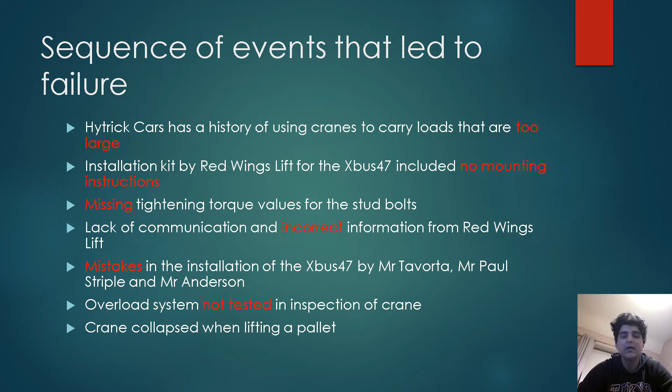When looking at the culpability of the parties involved, we decided that only two parties will share the most culpability. One is Hytrick Cars and the other one is Red Wings Lift. The reason Hytrick Cars shares the most culpability, specifically Mr. Anderson, is because he authorized the use of the crane, even though it was against regulations and it was not installed according to specification.

Also, Red Wings Lift is also held accountable because they delivered the wrong stud bolts to the branch, and they also failed to provide information for the installation of the crane when it was specifically asked by Mr. Anderson.

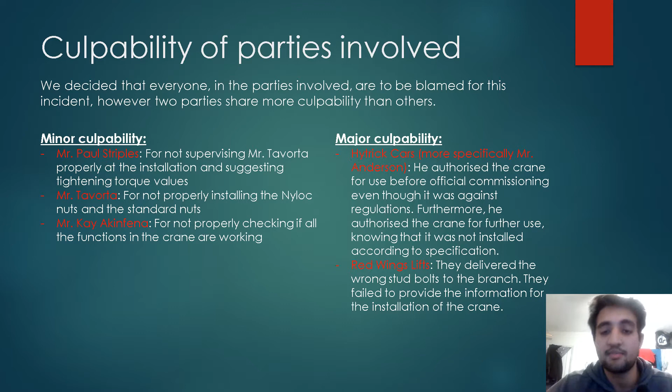Since the crane broke at the connection of the plinth and the base of the crane, this is where most of the design critiques must be. This is true because two major faults are identified here. The first one is that the nuts were fitted on the opposite way. The Nyloc locking nuts should be on top and the standard nut should be on the bottom. Since it's the other way around, it makes it weaker and the bolt more susceptible to detaching.

Also, the wrong stud bolts were used at this connection, as the stud bolts of the old crane were used instead of the stud bolts for the new crane. This leads to two issues. Both bolts have different tightening torques. The bolt that was meant to be used, the M30X500, has a tightening torque of 550 Newton meters, and the bolt that was used, the M24X500, has a tightening torque of 350 Newton meters. This means that the bolts would have over tightened.

In addition to this, both bolts have different proof loads and different minimum ultimate tensile loads. The bolt that was meant to be used has higher values for both of these measurements. This means that the bolt that was meant to be used can handle more load than the one which was used, and this could be a major factor as to why the crane broke.

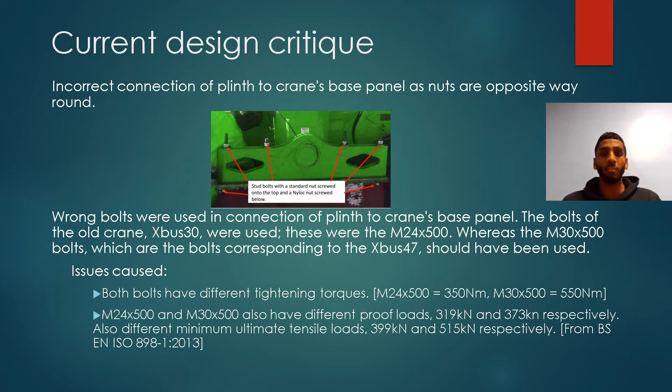For the design specification, we considered various aspects of the design and came up with criteria for each aspect. We based the quantitative aspects on common values for similar commercially available cranes, the Xbus47 itself, online information, and educated guesses. For example, one performance aspect is that it should have a high lifting capacity, and it should be able to lift up to 2 tons without failure. And then to test this, we will do multiple stress tests to ensure that it meets our criteria.

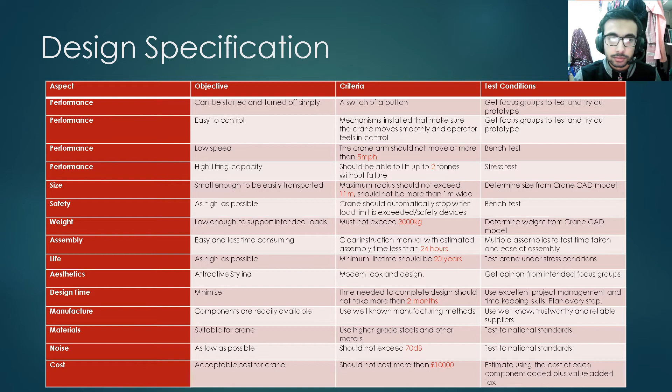Alongside the existing alarm warning system on the Xbus47, we should have additional safety devices added to our crane. Safety should be the #1 priority during crane operation, and therefore in order to protect the operator, we should use the latest technology that is available to us in order to maximize safety. The internet has given rise to clever ways to operate systems safely.

The Finnish company Epec Oy has come up with a Linux-based programmable controller that includes 4G connectivity and helps with digitalization and remote diagnostics, which will lead to a safer and more reliable operation of the crane. Currently, this technology is being used in bigger cranes, but can also be used and implemented on our crane model. Other companies are using a system whereby cloud data is used to calculate the ideal lifting route and therefore reducing the input needed by the operator, which will all in all increase safety.

Another safety device that we can use on our crane is a system like the AMCS Technologies anti-collision system. This system is able to prevent crane booms, hoist ropes, and hooks from colliding. It can stop the crane moving to areas of the workplace where the crane is not supposed to go.

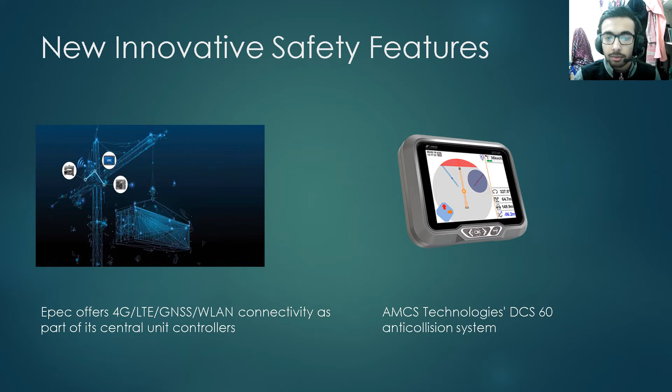It can calculate distances between components, and it also detects the speed at which the crane is moving. It also has a data log feature that registers all events and can be viewed remotely, so this helps solve any problems that might come up.

When looking at improvement in design for the new crane, we can implement an automated override system. This feature helps prevent injury to workers around the crane while working in the crane. And it also prevents further collapse of the crane, more specifically, the boom and the base of the crane.

It does that by using a feedback control loop, which calculates the load that's been lifted on the crane, and if that load is greater than or equal to the maximum load that the crane can handle, then the crane stops the function altogether. And this then tells the workers that they are using a load which is more than the maximum.

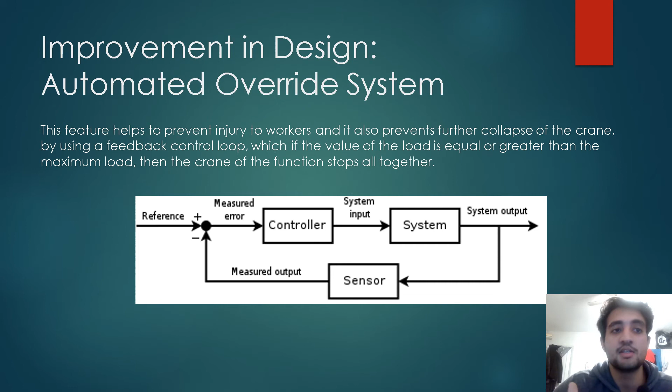One of the problems with the current design was that the moments experienced by the system would only be resisted by the bolt stud fastenings that held the base panel of the crane onto the plinth. This would put too much pressure on the bolt studs. To solve this, we can improve the design by adding more crane stabilizers to distribute the forces experienced by the system and lessen the loads on the base panel.

These would provide additional reaction forces to support the crane and improve its balance and structural stability. We went with a cross-tab formation as it adheres to our design specification. It doesn't affect performance, it's cost-effective, and it can be implemented at a radius of less than 11 meters. It also overall improves the safety of the system.

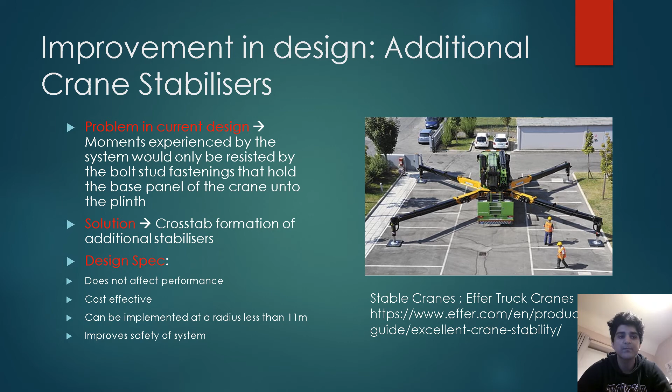The direct consequence was that the base panel lost connection with pins, and the main body of the crane dropped over due to loads carried on one side only and the corresponding unbalanced transverse moments. Hence, a counterweight could be a solution to prevent the overturning by applying an extra transverse moment to make it balanced.

Movable counterweights are commonly added on the counterjib of tower cranes, which is not suitable for our case, with a much shorter boom on the crane. So we just need to ensure that it is attached on the other side from the boom. The counterweights applied on the base panel also help with preventing overturning.

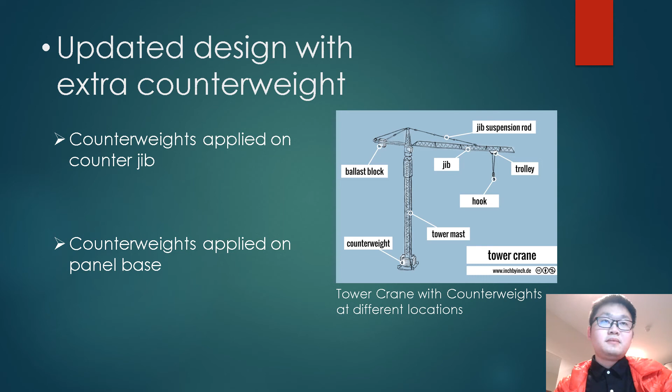For the risk assessment, we have three options, including Health and Safety Executive risk assessment evaluation, fault tree analysis, and failure mode effects critical analysis. Initially, we made the first draft with HSE style based on the materials uploaded, which is purely qualitative and helps us a lot in concluding the capability of each failure and the possible improvements for the new design.

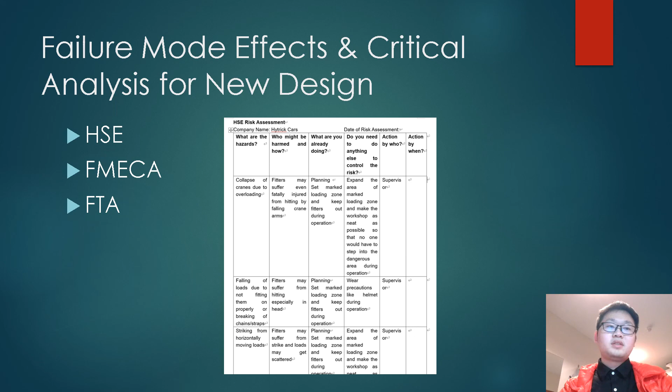However, according to the feedback from our last scenario, quantifying as much as possible would help the audience understand in a more intuitive way and be persuaded more easily. In our specific case, lots of explanations and clarifications will be necessary. So the purely quantitative FTA is also not suitable, leading us to the final choice, FMECA.

On our FMECA, we divided the crane into 8 components: grab hook, power supply, crane control, lifting chains, base, boom, overload alarm, and the control operating system. After identifying the faults, we first explained each component's function. The next step was to talk about the possible failures in each component. Then, we found what the local effect and the system effects of each failure would be.

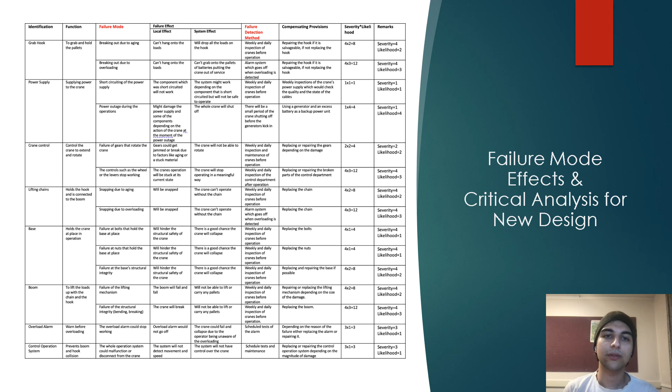After that, we talked about how we could detect each failure and how we would fix the problem if it ever arose. In the last step, we had to find how severe the accidents would be if they ever happened and how likely they are to happen. To figure these out, we brainstormed and rescheduled the possible outcomes as a group to determine the severity and the likelihood of the risks.